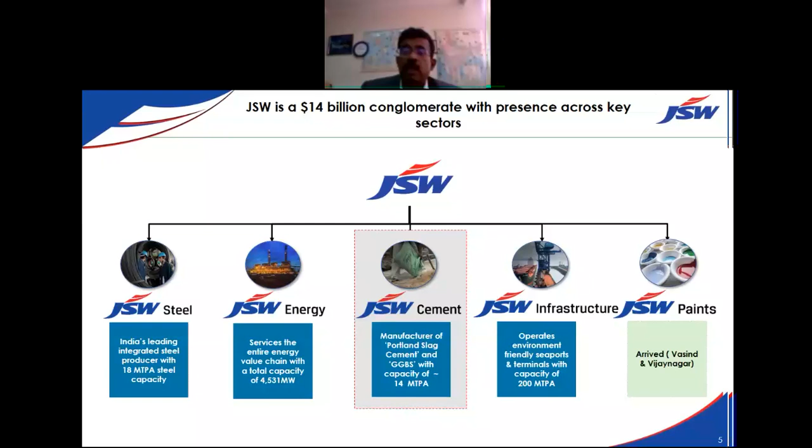We also have our own ports and jetties - JSW Infrastructure takes care of handling cargoes, seaports and all. Very recently, we launched JSW Paints, making both decorative and industrial paints. In this segment also, we are making eco-friendly paints, and you can get 14,000 colors without paying extra money. Different varieties of colors can be made - that's what we are making.

Our contribution to the success of the Indian story is phenomenal. Not only in the manufacturing sector, we are also into sports - Delhi Capitals, we are co-owners; we have the Haryana Steelers Kabaddi team and Bangalore Football Club, and also Inspire Institute of Sports, which we started in association with various industrial bodies to train Olympic athletes. JSW is contributing in a big way to the sports sector.

Apart from that, as part of social responsibility, education is one field we are helping with - lakhs of people near our plants have proper education, food and nutrition programs. This is part of the JSW journey.

We are mainly present in southern, western, and eastern India. Very soon we are launching a factory in Rajasthan, Kota - Kota is the capital. In Rajasthan we have bought some limestones because Rajasthan is rich in limestone. Maybe in a year or so, we may start a cement plant in Rajasthan also. That's the journey of JSW.

We have various products: JSW PSC cement, which is eco-friendly cement, one of the greenest cements in the country. Then we have blended composite cement, JSW Comp Cem, available in southern India - it's a blend of fly ash and slag together. And Concreel HD is one more grade of slag cement which gives similar strength to OPC cement. In spite of using slag, we can give strength parameters equivalent to OPC cement, because everybody is using OPC cement in many parts of the country, especially south India.

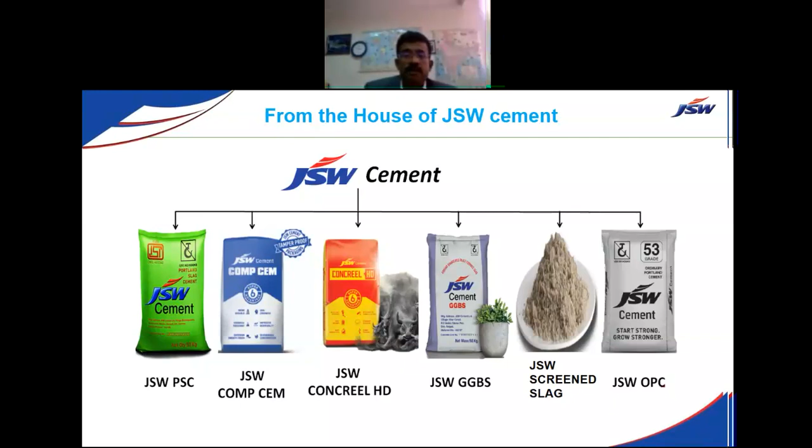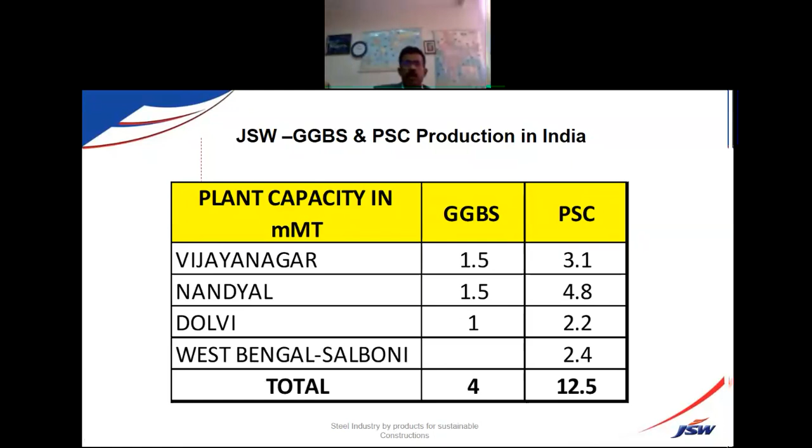Friends, this is our capacity. This was as on about 1 year back. 12.5 million ton capacity was there, and we have added further addition, and now we are close to 14 million tons. By 2020, it will be about 20 million. I mean, 2020 to 23, it will be about 22 million tons.

So coming to the main topic of today's presentation, challenges. The challenges the world is facing are phenomenal. By 2050, we are talking about 9.8 billion population living on the planet. Currently, it's about 7 billion population.

80% of the world population is moving towards urban environments, cities, because of better medical facilities, better health facilities, and job opportunities. People are moving towards the city. The migration of people is phenomenal in India compared to any other parts of the world, because take Europe or America, they are completely urbanized. But the maximum movement of the rural population towards cities will happen in India and China, because these two countries have the highest population.

So we continuously create more and more concrete jungles. When we create concrete jungles, what is going to happen? The passage of water will increase because we are concretizing the urban environment. More and more agricultural lands are getting converted to layouts, apartments, IT parks, industrial parks. Because of that, the water percolation when it rains doesn't happen at all. It starts flowing on the roads and buildings, and you are going to have urban floods.

With that, the city is getting completely flooded during heavy rainfall. More concrete jungle leads to the urban heat island effect, because the free flow of air doesn't happen when the buildings are there.

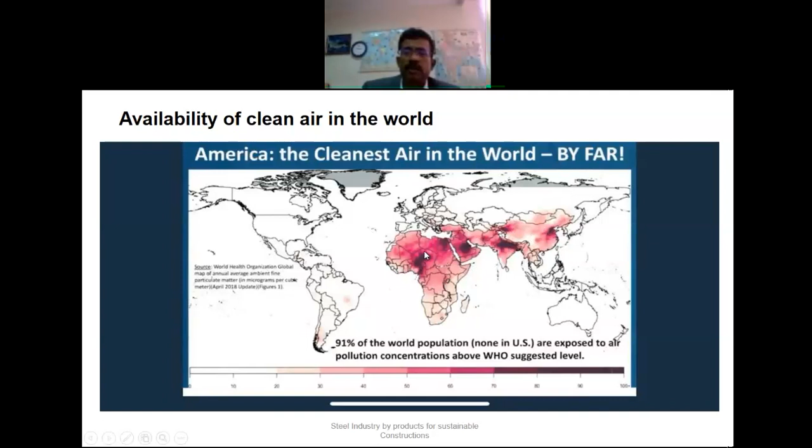So continuous emission of carbon dioxide leads to greenhouse gas effects, and with that we are going to have the urban heat effect. The city is getting more and more warmer. This is the environment we are getting.

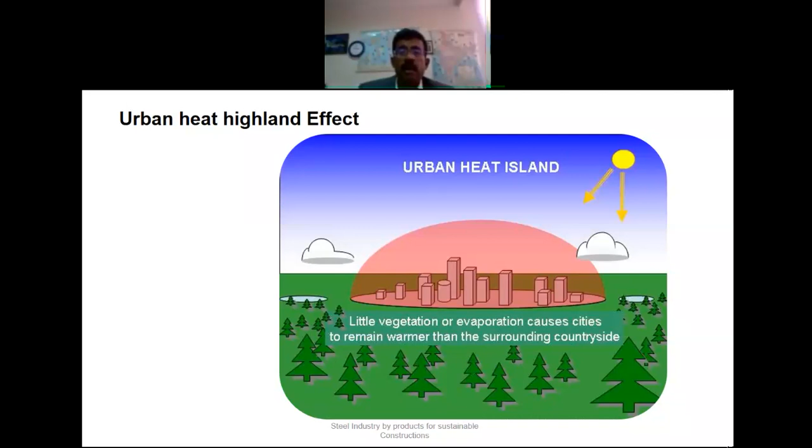Construction will not stop, as we all know, it's a continuous activity. We continue to build high-rise buildings. Take cities like Bangalore, Hyderabad, Mumbai, Delhi, they are continuously building high-rise because the constraint on land availability is increasing as we continuously move towards urban transport, metros. We need to continuously build tall structures surrounding the central business district where the metro lines are going, because of the government allowing higher FAR ratio. So as we continuously develop cities, tall buildings are coming, and construction activity will continuously keep on increasing.

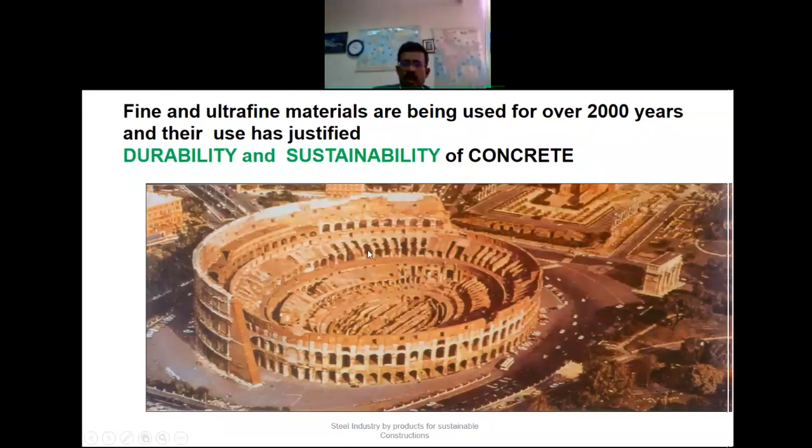Look at this building. The Roman Colosseum was built 2000 years ago, and still it is testimony, the building is standing, and they did not use cement concrete at that time. It was only lime concrete.

So sustainability, how to bring sustainability in construction? The bottom line is we should have sustainable construction continuously happening, it should be environmentally viable, equitable, bearable, and should give environmental impact, economic benefit, and social impact. This is what we are looking at from a sustainability index point of view.

Sustainability is nothing but reducing carbon dioxide emissions using local materials and bringing global technologies. Ultimately, we are aiming at lower energy consumption, lower carbon dioxide emissions from construction activity, and giving a prolonged life to the buildings, reducing the life cycle cost, and increasing durability of the building.

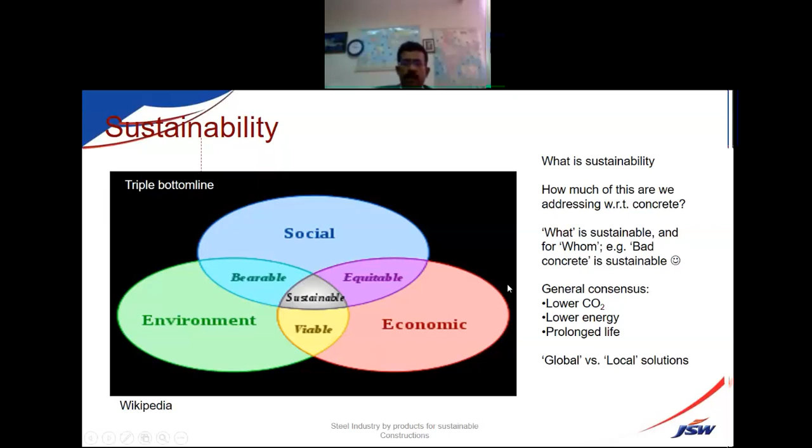So a green building is one which helps in reducing the carbon footprint, increased productivity, improved health, and occupation of the building. It helps people to live a peaceful life.

Coming to sustainability in concrete, dear friends, concrete has many ingredients. We have cement, aggregates, fine aggregates, and we use water. In Rajasthan, availability of water is a scarce commodity, so how to conserve water while making concrete is very important, because we need water both for making concrete and for curing it.

This improves durability of structures. Like the Roman Colosseum, which has stood for more than 2000 years, when we build structures it's not just for ourselves, it's for our generation and the next generations. If land value goes up, people may build higher buildings. Otherwise, people who build their own houses build for a lifetime, for their children's lifetime. So sustainability in concrete making comes in various ways.

Cement - how can we bring sustainability in cement? As I've already told you, 1 ton of cement liberates about 800 kgs of carbon dioxide - that is OPC cement. So you can bring sustainability in cement by using supplementary cementitious materials like fly ash and slag, GGBS. That is one thing we can do.

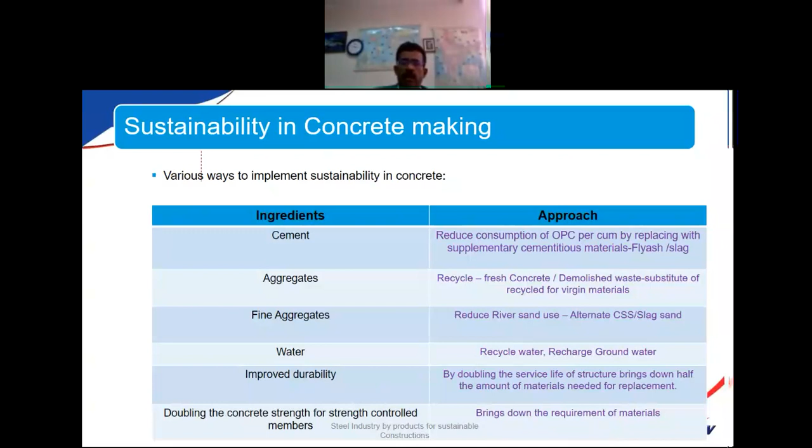With all that, whether durability of the concrete is getting affected is a challenge. I'm telling you, friends, using all these replacements, durability is not going to be affected at all - you're going to get more and more durable buildings only. That is what I'm going to advocate in the next slides of my presentation. So finally, we are looking at doubling the concrete strength in strength-controlled members.

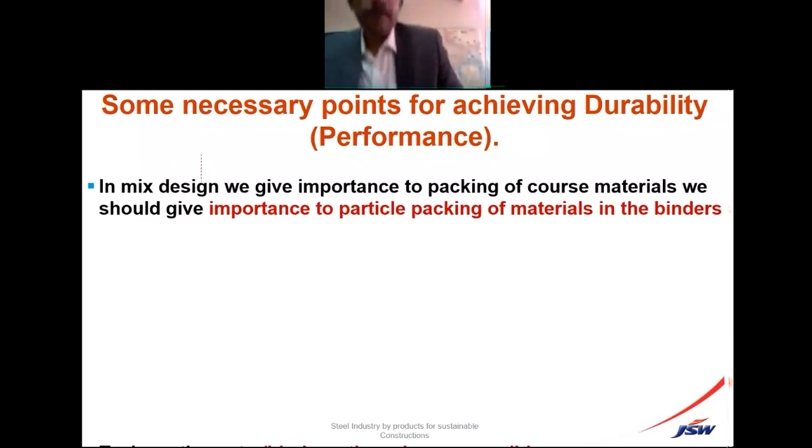So, some necessary points for achieving durability performance: we are looking at improving the performance of concrete by making the particle packing effect very effective within the concrete, and also keeping the water binder ratio as low as possible. That's what we are actually looking at.

We should use good quality fine materials like slag and fly ash. So gone are the days of excessive use of OPC and water - we have to reduce usage of pure OPC cement and water. However, curing is very important in concrete making.

1 second. There was a small thing.

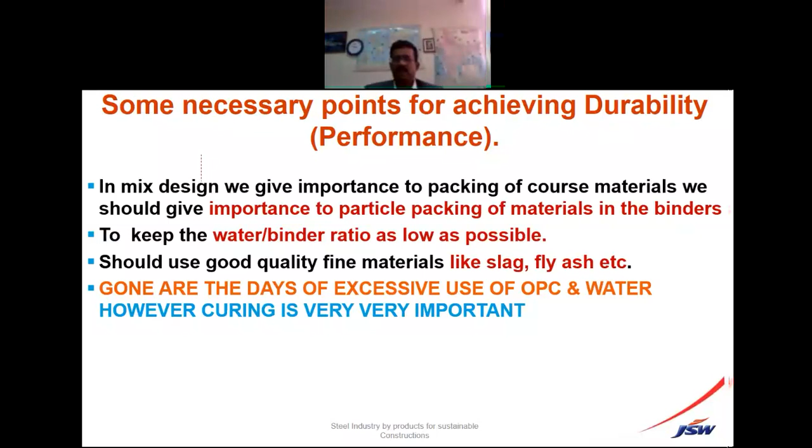However, curing is very important in concrete making. So, dear friends, the new generation green materials which are eco-friendly - looking at mineral admixtures, chemical admixtures, alternatives to river sand, and alternatives to coarse aggregates - these are various types of alternative materials now available in the construction field. This has been developed through scientific research and is being adopted everywhere, in each and every part of the world, not only in India.

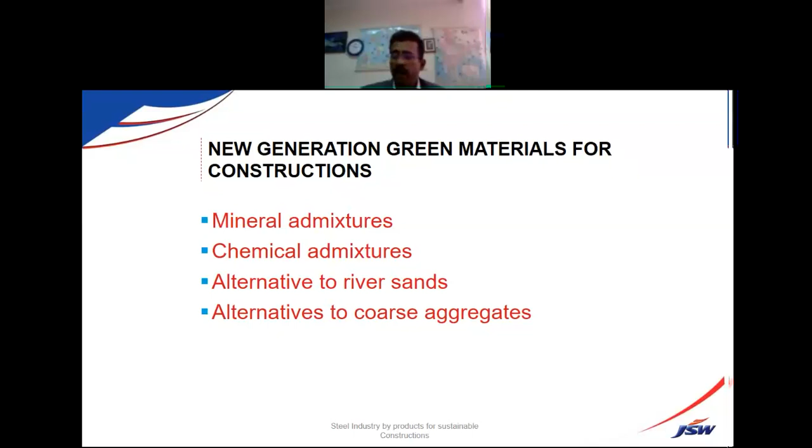People are moving towards sustainable construction, moving towards net zero buildings. That means the entire building life cycle doesn't emit any carbon dioxide. So that's the way we are looking to develop sustainable solutions for construction.

Coming to the one product that always comes to mind - sand. Everywhere you can get high quality cement because it's manufactured by reputed companies and corporates, so you don't have any problem with cement. But when it comes to sand, you have a problem, because sand is traded locally - local agents will give sand.

We don't know what is mixing, where it's coming from, and all that. So the quality of sand is always an issue when selecting sand. And nowadays the river sand has been completely banned.

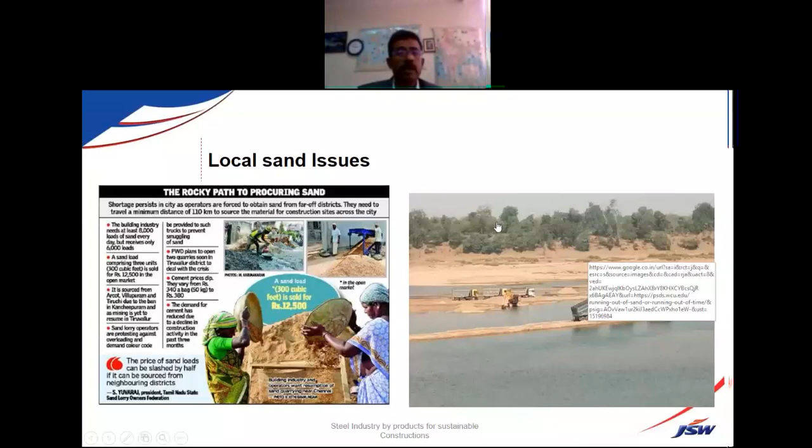Because if you are using sand from the river basin, there's an issue. The flow of water in the river is getting down every day, and we have a problem with groundwater sinking day by day because of the continuous dredging of sand from the river basin. So considering all that, the river sand has been completely banned all over the country.

We know there's a UN report on sand mining. They're talking about close to 59 billion tons of sand being mined globally for construction activity. This is a huge number looking at the material demand.

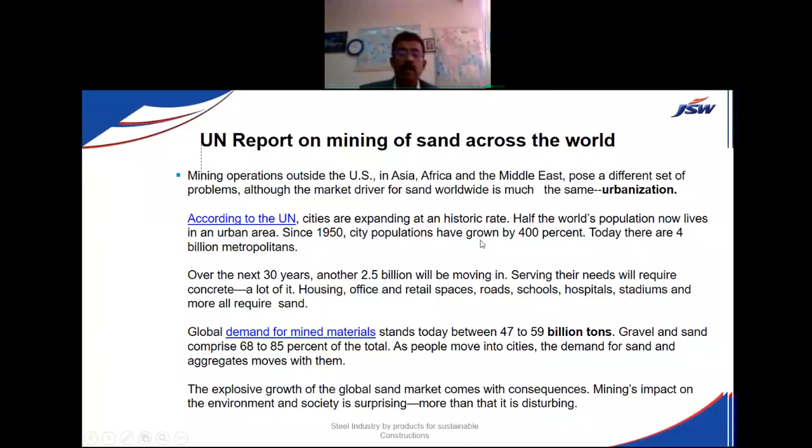So we need to use alternative materials to bring down the dependency on natural materials, because natural materials are not going to be available continuously.

So this is one river basin. You can see it's kilometers together in China, because continuous dredging of the river basin for sand makes the river completely barren. There's no water flowing in this river at all.

In India also, considering the ecological imbalance, people stopped dredging river sand. In some parts it's available whenever there is excess sand, because you need to continuously maintain the depth of the river, otherwise water will start flooding everywhere. So to manage this, they allow a certain portion of the river to be dredged and mined for sand.

This rally for rivers by Sadhguru Jaggi Vasudev, he started for the Kaveri. All along the Kaveri basin, they wanted to plant trees in a 1 kilometer stretch so that the flow of water improves in the Kaveri basin, which was earlier a perennial river but is now not flowing every season.

So they are planning to improve the flow in the river basin. Earlier we demolished the river basin by continuously dredging the river sand.

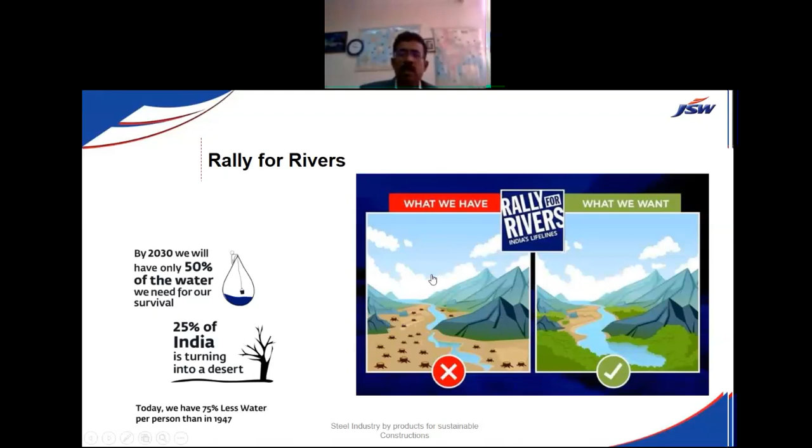So if I give you sand which is equivalent to river sand, from a byproduct, will you not accept it? One that is similar to river sand in terms of properties—in fact better than river sand in terms of purity. If I give you that kind of sand, you'll definitely accept it.

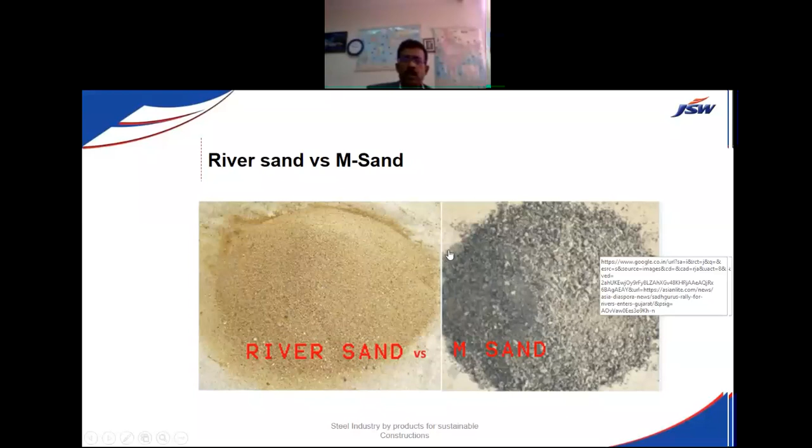So in that direction, JSW has done a lot of innovation and research work to reduce the dependency on sand from river basins. When we look at river sand, we have scarcity, environmental issues, and legal issues. So to replace all that, we have developed technologies called alternative aggregates.

The government of Karnataka also came out with a circular that manufactured sand can be used. This manufactured sand comes from various sources, like breaking mountains. But even breaking mountains for sand is not an eco-friendly activity. For aggregates, you break mountains using crushers and all, but if you start doing that for sand too, it's not going to be very environmentally friendly.

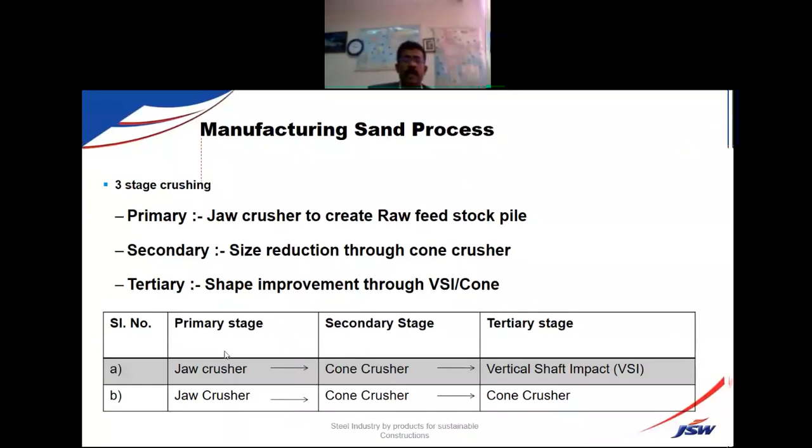Considering that, even the Karnataka government started importing sand from Malaysia. They were trying to sell it in bags, but that also did not materialize. So then JSW came into picture to manufacture sand from steel slag.

These are the various manufacturing processes we have. So for M-sand, the advantages are many. It's an ecologically benefiting product—it's eco-friendly because it avoids the dredging of rivers.

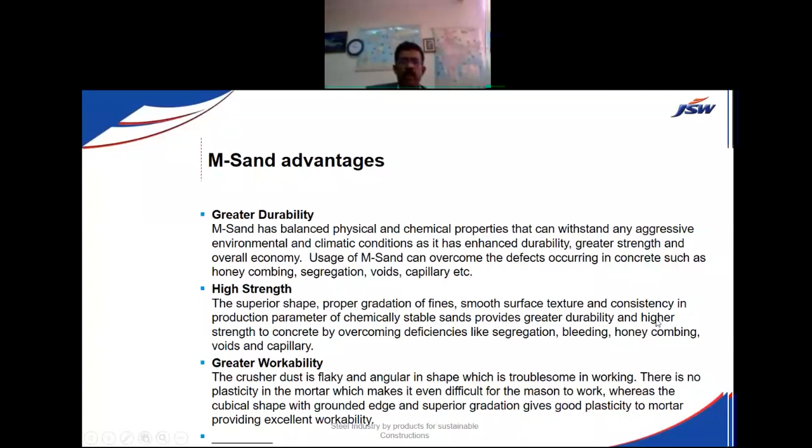And looking at the advantages, there's greater durability and performance enhancement. You get higher strength in the concrete and also greater workability compared to river sand. These are the advantages of M-sand.

This is one of its kind in the country. JSW has installed a sand manufacturing factory at our Bellary Toranagallu plant. This sand is being manufactured using our slag, which is a byproduct of the steel industry.

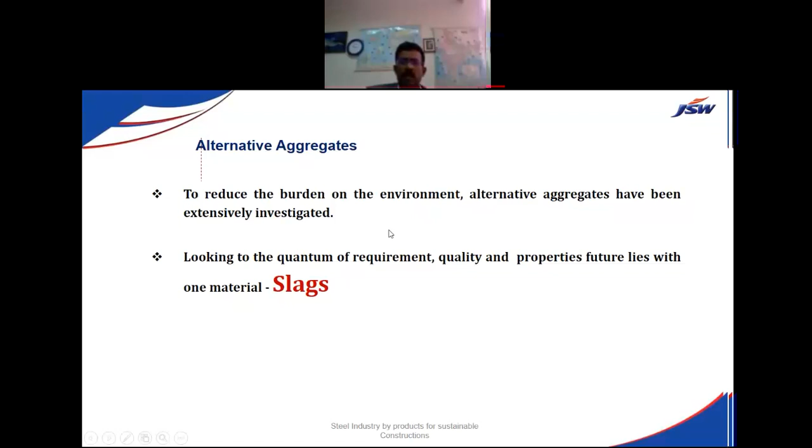So I would like to talk more about slag. A lot of research work has happened in many universities and colleges on slag sand, and they have come out with excellent results.

So what is slag? Slag is a byproduct of the steel industry. It's a non-metallic product—a product of silicates and aluminosilicates of lime, which we use for making steel. It's a byproduct, so I would like to explain how it is manufactured through a pictorial presentation.

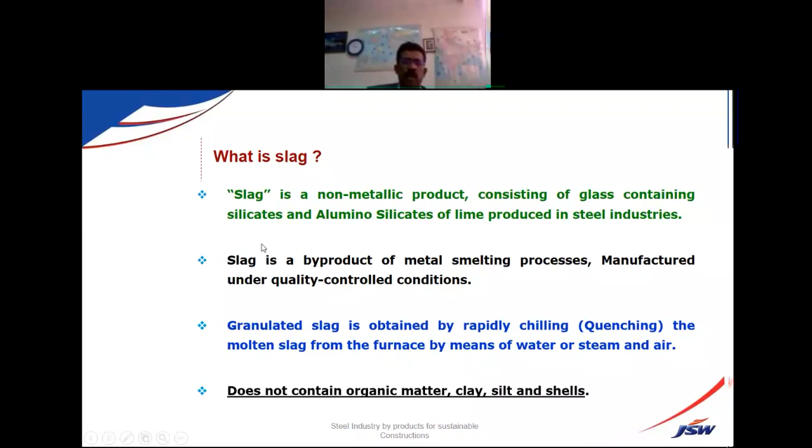This is the pictorial presentation. This is the iron making process, where we have a blast furnace in which we add iron ore, then we add fluxes and coking coal.

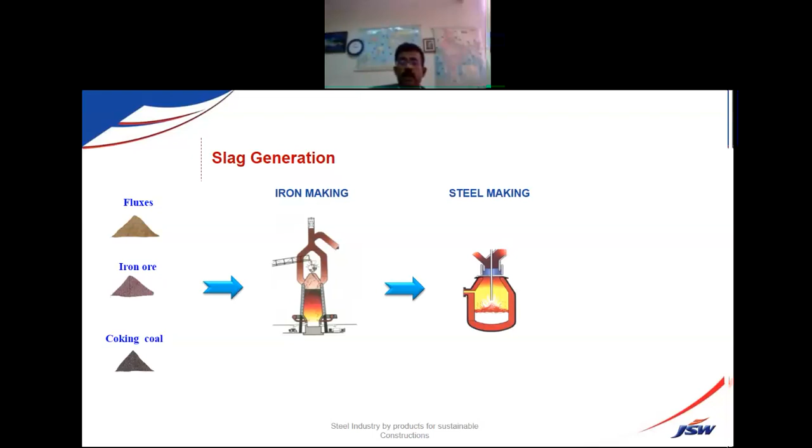This byproduct is taken out and quenched using chilling water into granules. This is a highly mineral rich product which can be utilized for making various products. So in steel making also we generate slag. As I told you, in iron making we generate 300 kgs per ton.

In steel making we generate about 200 kgs per ton. This is what we get in steel making. It's quite a substantial quantity considering the steel production in India, about 130 million tons.

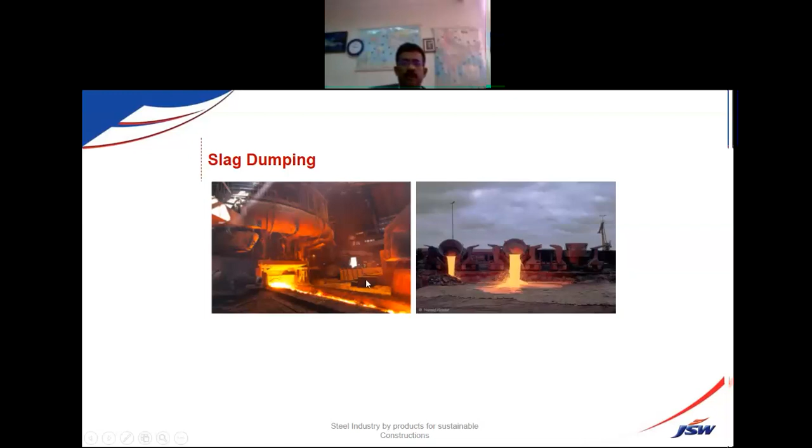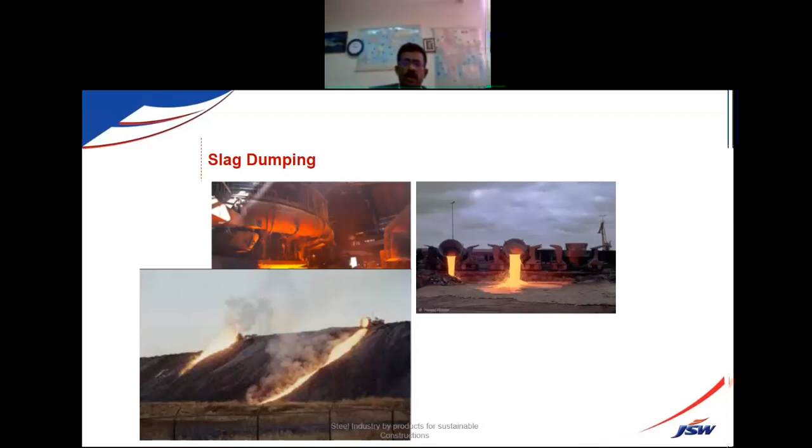So slag dumping happens - this was an earlier method. People used to dump slag and were not bothered. But in countries like Europe, Germany and other European countries, they started using slag long ago, more than 100 years ago, converting it into useful products. So it's like a mountain of slag, but it is now being consumed completely into valuable products.

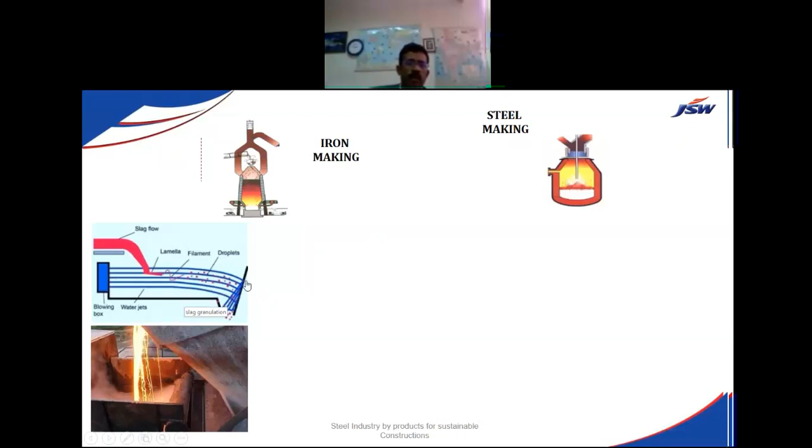So how do we convert it into a useful product? When the slag comes out, we have a separate setup. Through that it flows, and we put water jets and a blowing box. With that it gets converted to small granules, becoming granulated blast furnace slag used for fine aggregates.

When we do air cooling, we don't use this methodology - it's from the steel making. We get air cooled LD slag, which is a little darker in nature. We make coarse aggregates from this. These products are very eco-friendly products which satisfy the requirement of aggregates, and can be utilized in every application - roads, construction, concrete making, house building, everything.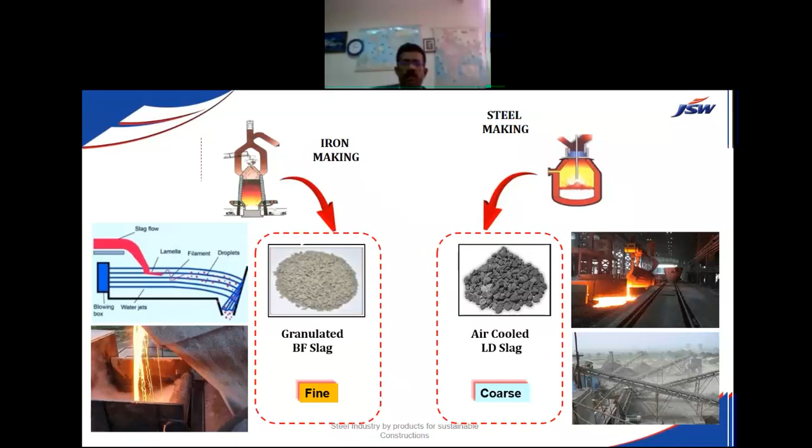Looking at the specifications, I've given a small gist here. River sand is there and also GBFS, the original material. It was not meeting the exact requirement in terms of specific gravity and density, because river sand density was 1400 to 1700 kg per meter cube, and this slag was giving 1000 to 1100 kg per meter cube density. Specific gravity was also less, and water absorption was a bit more compared to river sand.

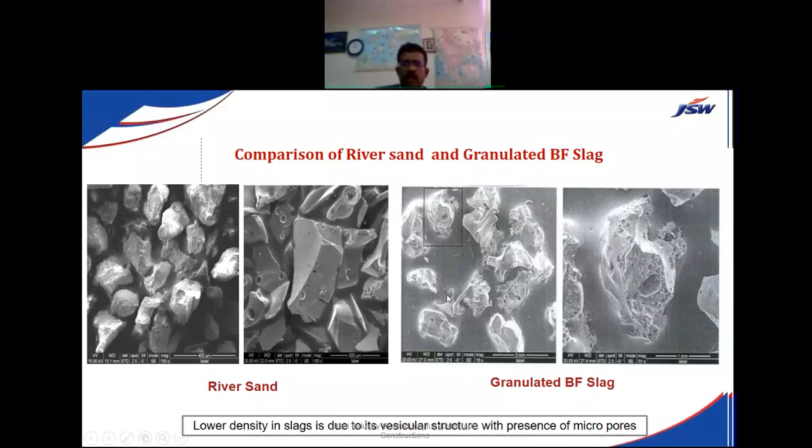So to remove the oversized particles, and improve bulk density and specific gravity, we used a manufacturing process - first of its kind in the country - and converted the granulated blast furnace slag into processed granulated blast furnace slag, which meets the requirement of our IS standard as well as the specifications of river sand. The processed one has the particle shape completely improved, with no sharp edges. The processed granulated blast furnace slag is similar to river sand.

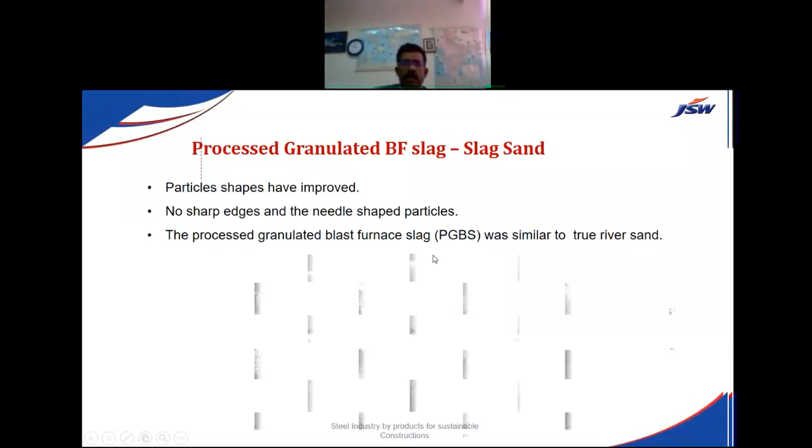The granulated blast furnace slag, at this stage, is getting converted into a finished product. The processed one has a round particle shape, and also uniform particle size. Looking at the gradation curve, the processed slag, what we call manufactured sand, meets the requirement of gradation zone 2 specifications as per our river sand.

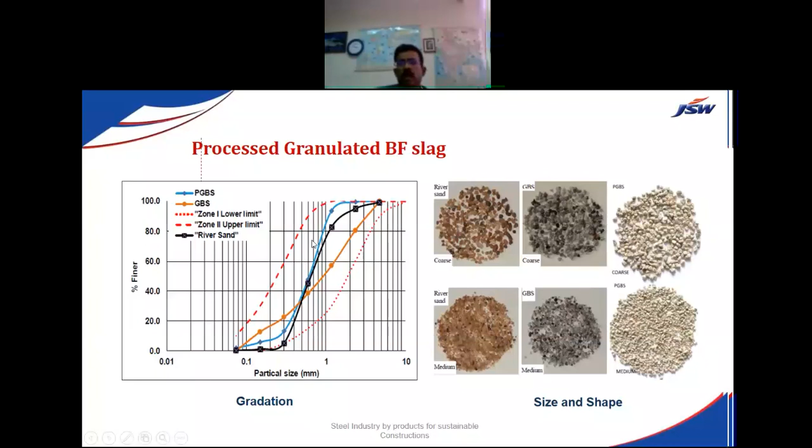So you can see a changed product. The density is already improved to 1500 kg per meter cube, compared to the GBS which was earlier the raw material. And even the specific gravity is 2.65, meeting the river sand specifications, with water absorption less than 3%. So by changing the product through process industry technology, using global technologies and manufacturing processes, we can modify the product to meet river sand specifications.

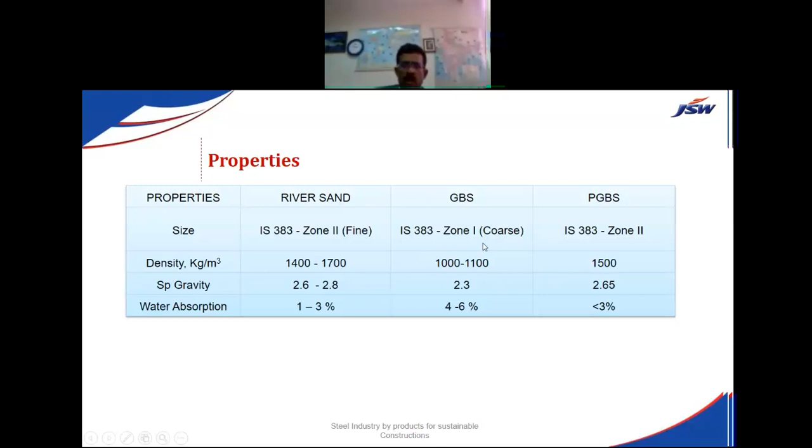You can also look at the advantages. In case of slag sand, we don't have marine products, about 2 to 4%, which river sand has - because river sand is a natural sand that flows through hundreds of kilometers before we take it as river sand. So we get oversized particles, clay and silt - it's a mixture of everything. We need to really sieve the sand to get good quality river sand for plastering or concrete applications.

In case of slag sand, it's a ready-made product from a manufacturing process - that's the advantage of slag sand. So even though this product was being dumped earlier, now it is being used as a useful product for construction applications. You can see the comparison between slag sand and river sand, having similar shape and particle size - this is the microscopic picture. We have modified the particle size to be similar to river sand.

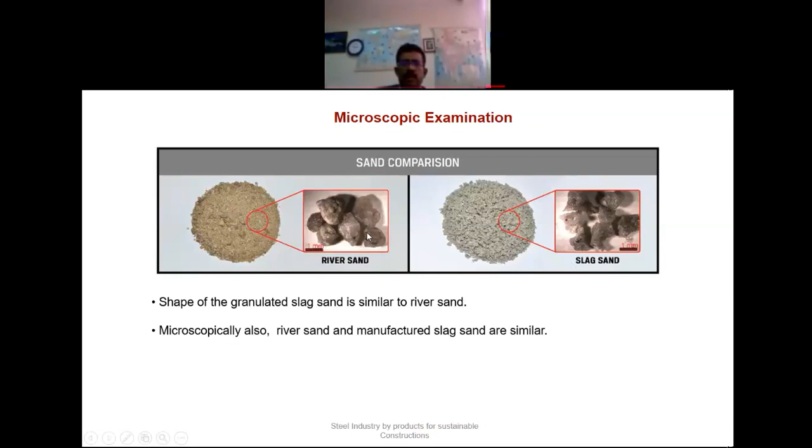Through various research work, we have found that even though the code is now giving about 50% replacement for plain concrete and 25% replacement for structural RCC, we can use 100%. We have done various studies and we are now requesting the Bureau of Indian Standard to allow us to go with 100% replacement. That may happen very soon.

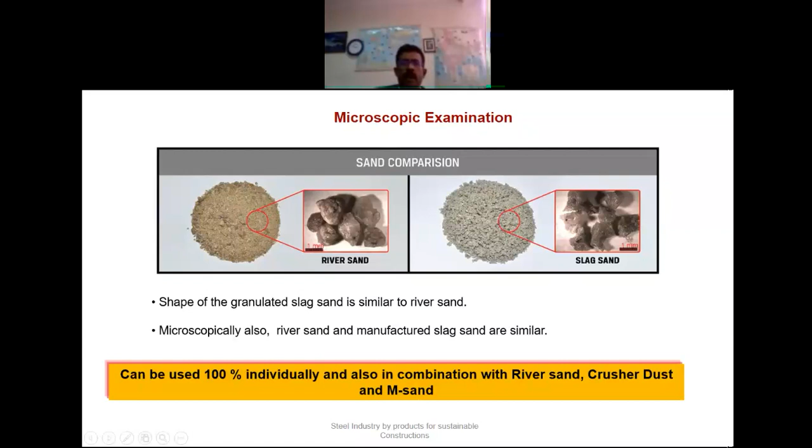So, to accept any product, my dear friends and students, we need to analyze the various chemical and physical properties. We need to conduct tests and ascertain the properties as per IS 383 specifications. We have done all the tests at various reputed laboratories like Indian Institute of Science, NCCBM, Bureau Veritas, and various other laboratories in India.

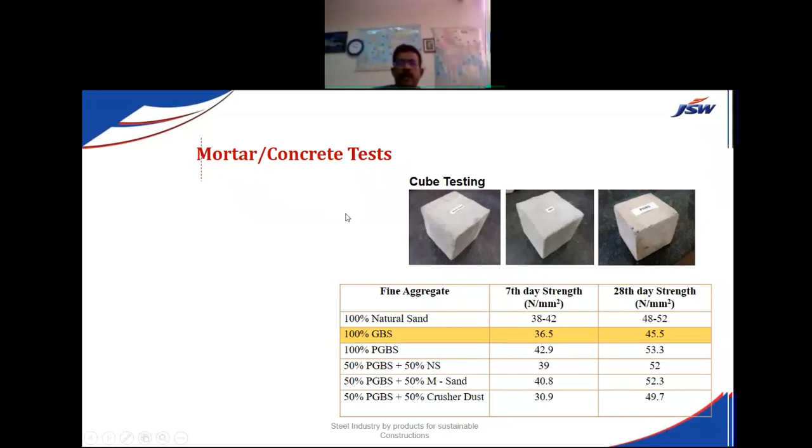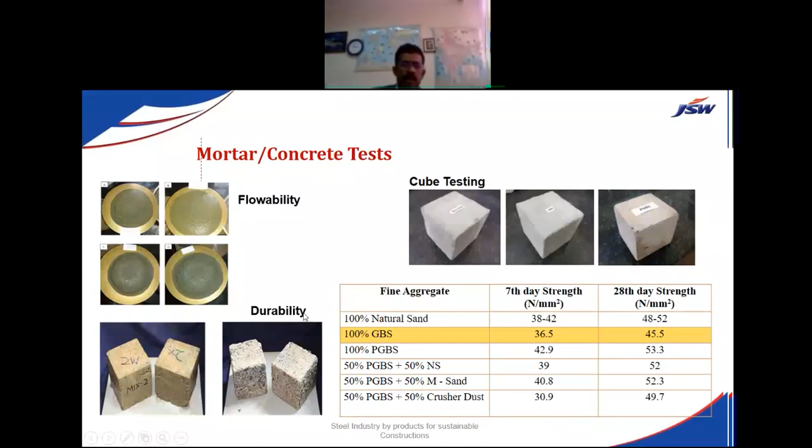We have also done flowability tests, durability parameters, acid tests in acid medium, alkali silica reactions - everything has been tested as per the requirement.

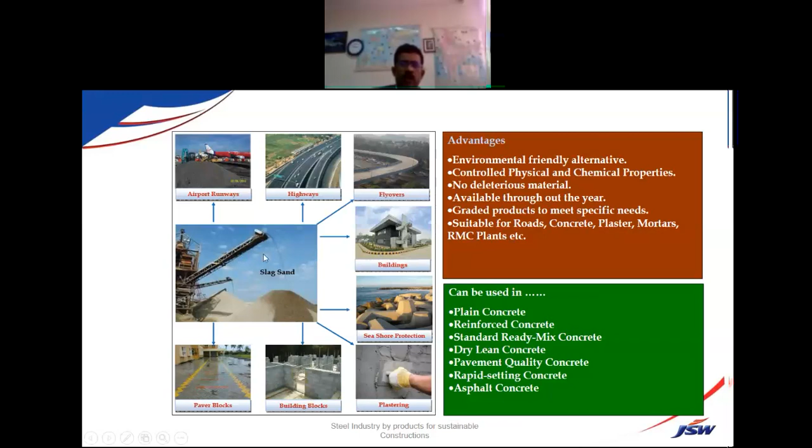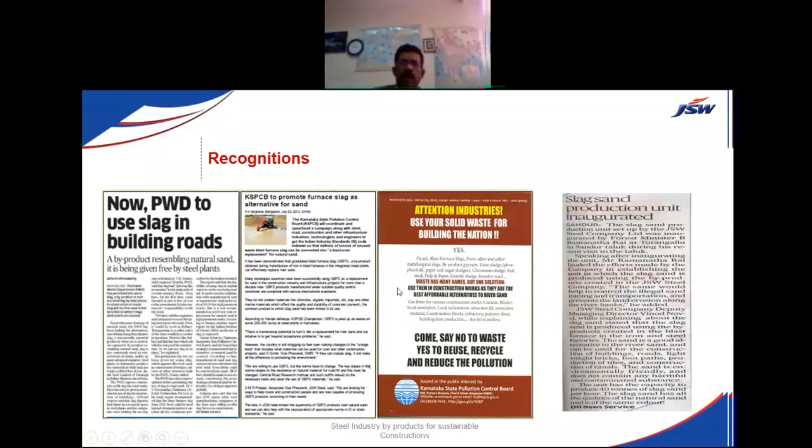Using slag sand, we manufacture many products with many applications - for airports, highways, plastering applications, buildings. The Government of Karnataka PWD has approved usage of steel industry byproducts in their specifications, and the Pollution Control Board has also given clearance. These are the various testimonies we have.

Slag is the best alternative to river sand. Expert opinion is also there in various leading magazines. Many articles come in leading newspapers about how it is eco-friendly and how it is helping.

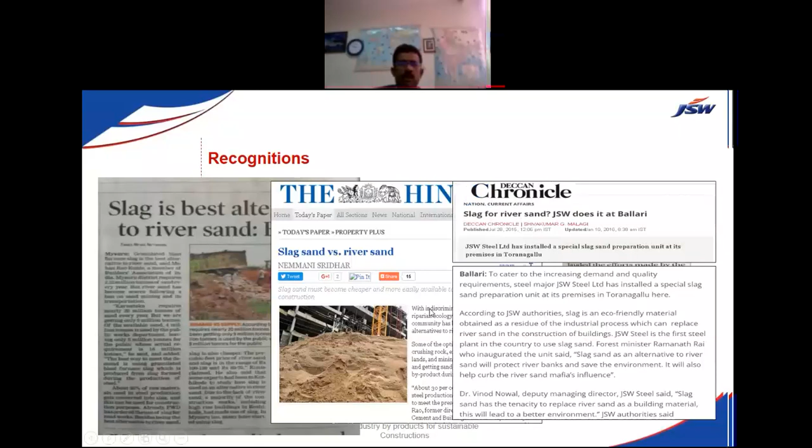So these are the various applications, my dear students and friends. We have got almost 10 square kilometer campus near Bellary, that's Vijayanagar. We have our housing colonies and factories there. It's a big setup, like Jamshedpur - actually much bigger than Jamshedpur.

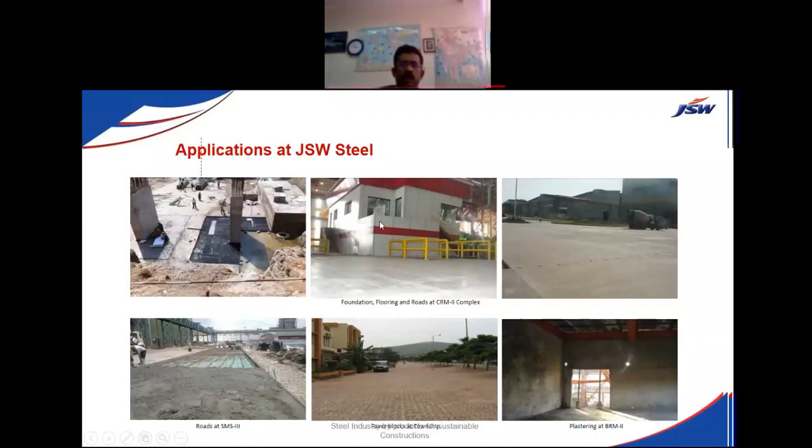It's an industrial town. For all the building construction, we are using this product for plastering, pavement quality concrete, buildings. You can see the structures - even heavy duty floorings have been done with these products at JSW steel mills, where we put all the steel coils on the flooring.

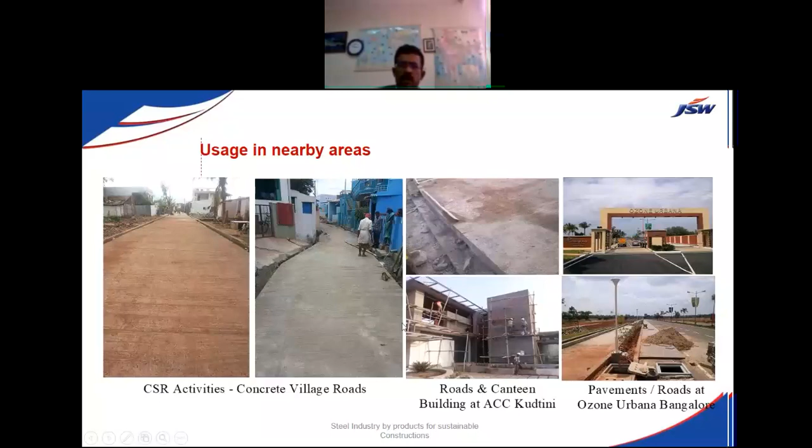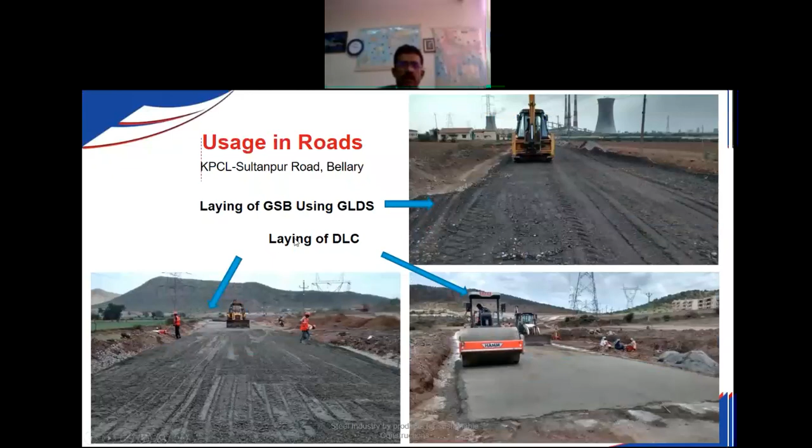We have also worked with nearby village roads, and in Bangalore we are using this for Ozone Urbana road works. Government projects like Nirmiti Kendra have started recommending and using slag sand, as has Karnataka Power Corporation Limited. Many projects are continuously using it in road construction, including Karnataka Rural Infrastructure Limited. It's approved by all the parties.

So it's a completely slag road being built by Gammon India.

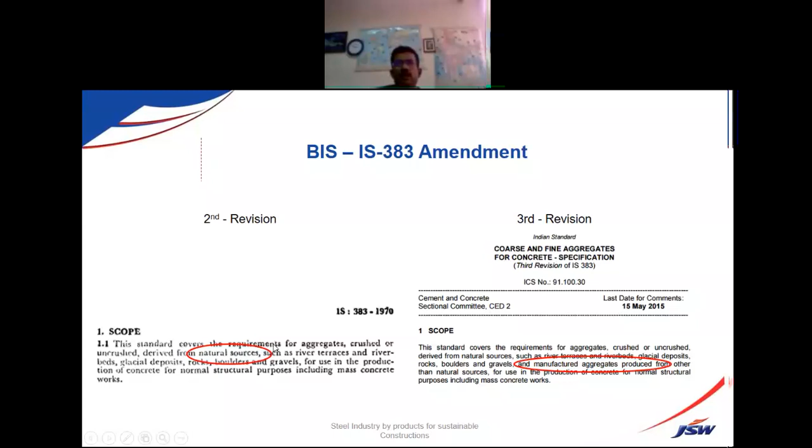There's a recent change in the IS 383 specifications. Earlier they mentioned that fine and coarse aggregates should come from natural sources, because at that time, in 1970, natural materials were abundantly available. But nowadays the code got a revision in 2015, and they have mentioned that manufactured aggregates can be used. So in the code also, the usage of aggregates from artificial sources like byproducts is now approved - there is no problem at all.

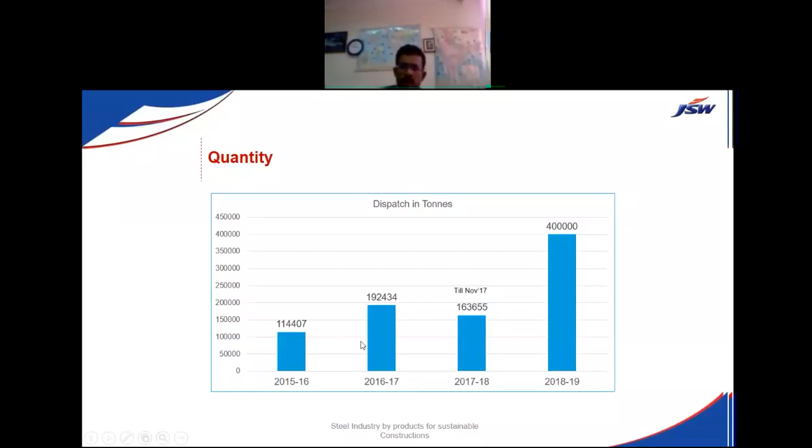Coming to the next stage of the product, the slag can get converted into GGBS, ultrafine slag, and cement. We take that blast furnace slag and take it to the cement mill using a vertical roller mill, and grind it to fine powder. This becomes part of a cementitious material called GGBS - a very eco-friendly product, with close to 3 million tons per year being consumed in South and Western India.

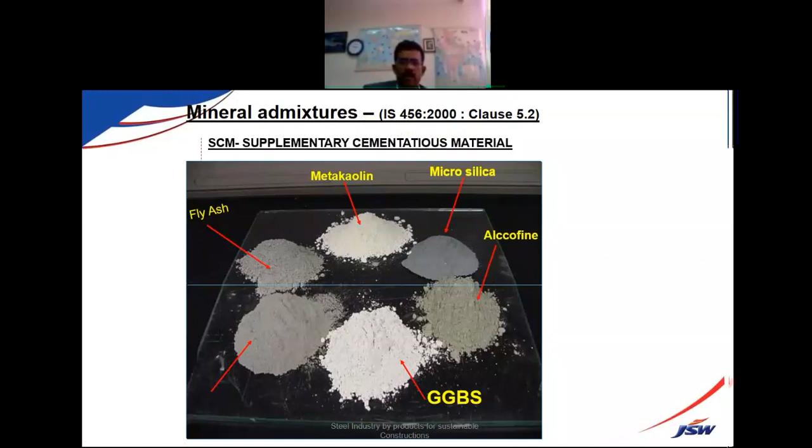So dear friends, you can ask me, sir, this product is very good, I know, but can I use it in concrete applications anywhere? You can use it because IS 456, table number 5, clearly mentions the usage of fly ash or ground granulated blast furnace slag in concrete making at various percentages based on exposure conditions - mild, moderate, severe, very severe, extreme. We can use this product in various grades of concrete - we have done M100 grade concrete also using GGBS.

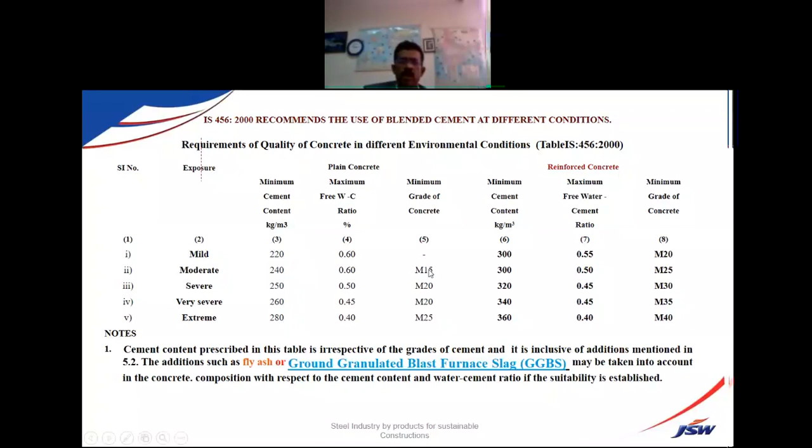The mineralogy of the slag I want to share. There's an IS code, IS 12089, which says the manufacturer of slag should have certain properties. The glass content is one they talk about, 85%. What we are manufacturing at JSW is between 90 to 95%, which is almost similar to slag from Japan.

Japan are the people who are expert in making good quality steel. There they take out the slag and consume 100% of it in all concrete productions. Japan is one of the biggest countries in the world which manufactures steel, and they consume 100% of the slag produced from the steel mills.

Similarly, IS 456:2000, considering durability parameters when sulphates and chlorides are present, exposure conditions, Table 4 clearly mentions the usage of slag cement when both chlorides and sulphates are present in the concrete.

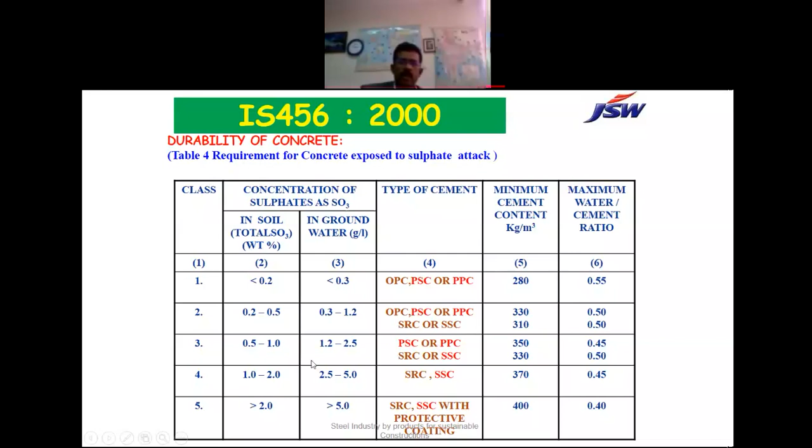Coming to the percentage usage based on applications, we can use this slag in concrete making starting from ground structures. When early strength is required, we can go to 25 to 35%. For underground structures, 35 to 50%.

For mass concreting applications, about 50 to 65%, especially raft foundations, 1 meter above raft foundations. Generally they go with high percentage of slag to reduce the temperature differential between the top surface and the middle of the concrete, which should not be more than 20 degrees centigrade.

So in many raft foundations, you have to control the temperature during the initial stage. They go with replacement of OPC cement with slag.

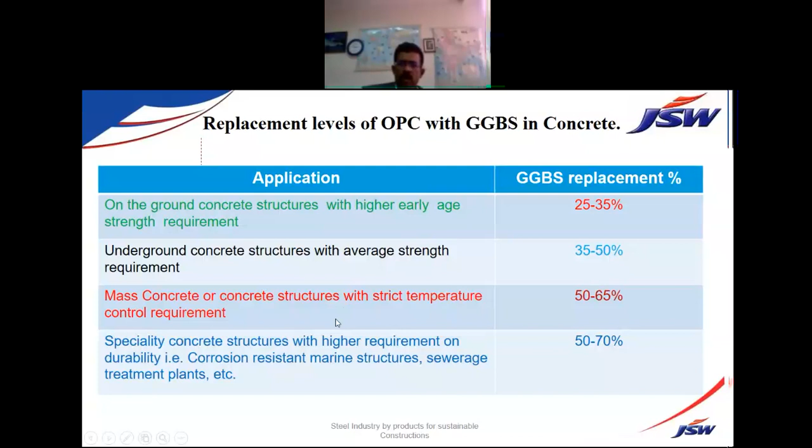There are concrete structures built in marine environments, sewage treatment plants, where 70% is a must because these structures face sulfate attack, chloride attack, acid attack, and alkali silica reactions. So the concrete has to be very strong. If you make it with pure OPC cement, 100%, the concrete will deteriorate within 5 to 10 years. So to have a structure lasting more than 100 years, you need to go with a higher replacement of slag.

So this, if it is there in the body, starts leaching out. You can see white patches coming out after 3-4 days of concrete making. This is called calcium hydroxide. So this is detrimental. Generally, sulfate attack, chloride attack, and carbonation happen because of this product.

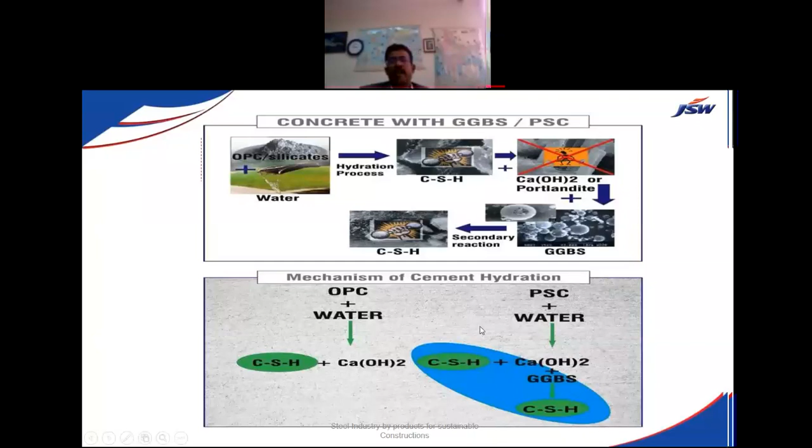This is the pictorial presentation, the line diagram. You can see additional calcium silicate hydrate gels being formed because of the hydration process. This is the line diagram I've already explained to you. It's a beautiful product.

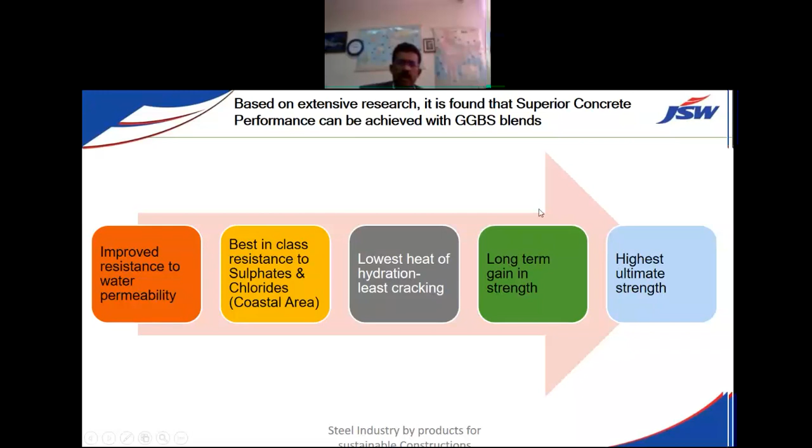It may not be available in Rajasthan currently, but if you want, you can get the material. We can give it to you for research work and all, so you have to pay the freight for that. You can do a lot of research work with it. Very soon, you may also start getting the slag if more steel plants come into that area.

This I've already explained, the improved performance, and there are many case studies. I don't want to spend much time, it's already 10 o'clock. These are testimonies of the product's usage in various projects: Tricon RMC, Sobha Indraprastha project, Bangalore Metro Corporation, Pune Metro Corporation, Mumbai Metro Corporation, Chennai Metro Corporation. Many government departments are using these products. Let me go through this quickly.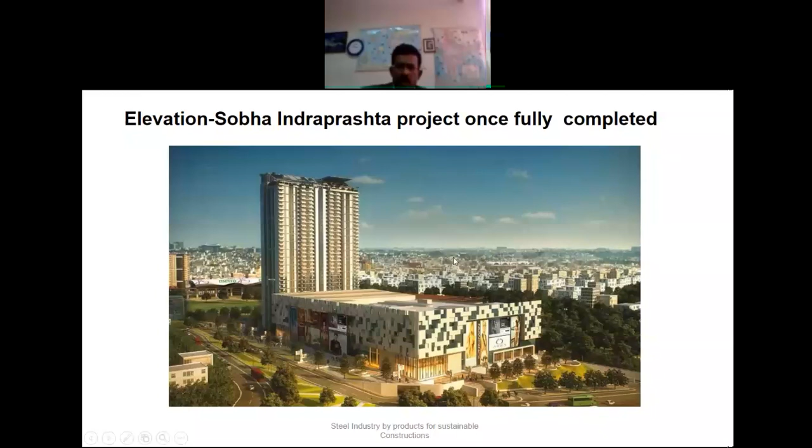This is one of the biggest malls in India, recently opened, Sobha Mall, Globus Mall, with these concrete strength parameters. You can see M25 grade concrete, using 170 kg OPC and 170 kg GGBS, developed almost 56 MPa strength.

This is the record I have taken from the laboratory, because we kept the cubes for 56 days, 90 days, and 180 days. Since you may not believe me when we just type numbers, this is the actual record from the laboratory, so you understand the data is authentic.

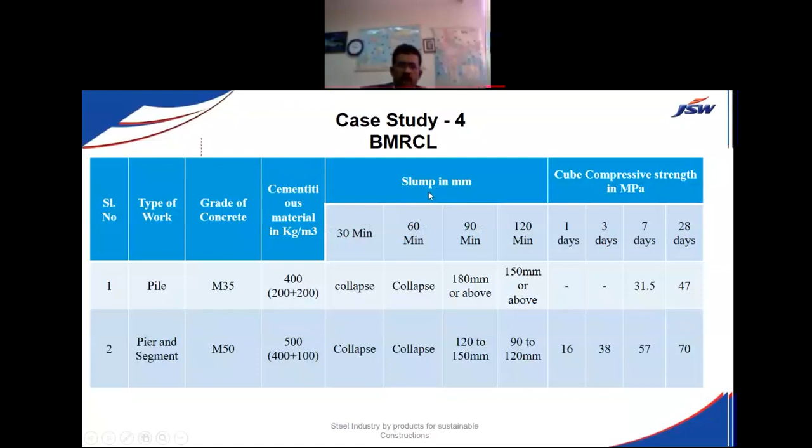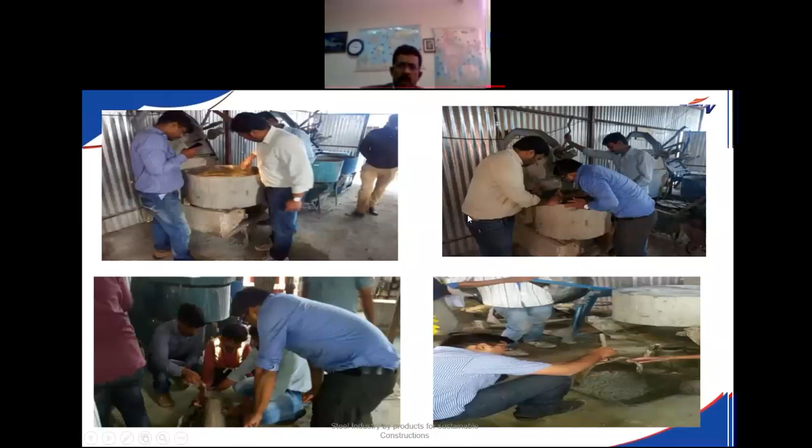This is Bangalore Metro. In all stages of Bangalore Metro, they adopted various grades of concrete. These are the trials our team did along with the Bangalore Metro team, because earlier they weren't ready to accept these products—everybody has their own doubts when a new product comes. So we worked with everybody, did the trials and mix designs, and it was successful. Now each and every package, they come first.

They ask, 'Sir, what is your GGBS rate? We want to include it in our specifications.' They want to use it like that, they tell us. We have also done these strength parameter studies in various labs.

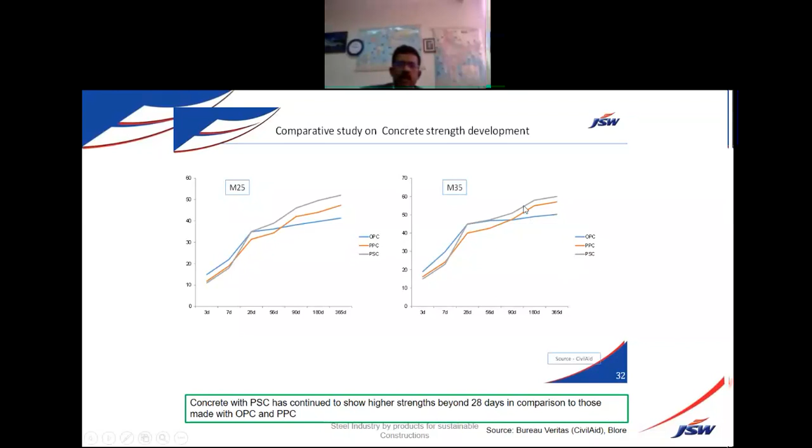M25, M35, you can clearly see the growth of strength. The PSC cement strength is much higher than OPC cement.

This RMC industry in India is continuously growing. Way back in 1990 it started, and in 1992 the first RMC plant was started in Pune. Growth has been phenomenal because of the huge demand for concrete on project cycles.

The first phase of development was only in 78 cities. I feel now each and every city has RMC plants—maybe more than 200 cities and towns in India have more than 6,000 plants. This is the growth; I was part of RMC India and traveled across India to establish RMC plants.

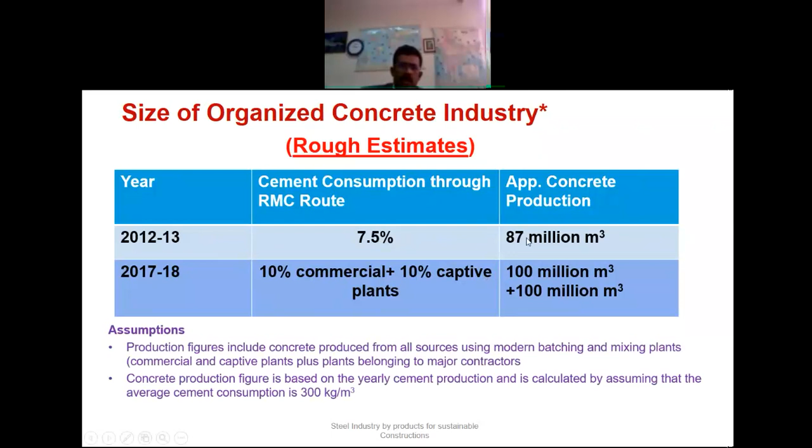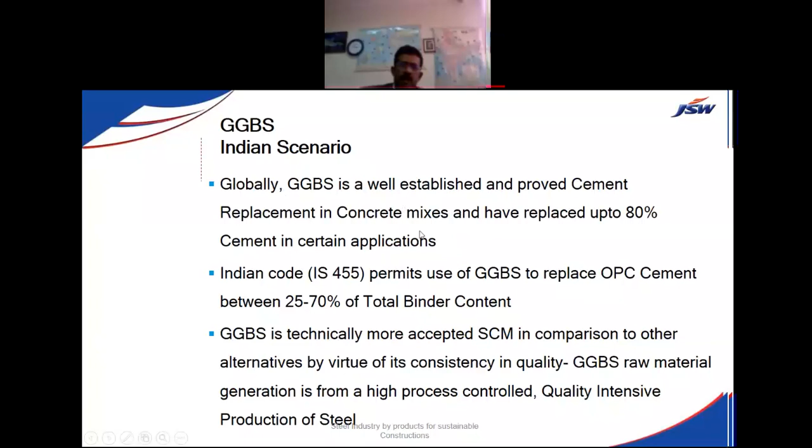You can see the growth of the RMC industry, and the demand for this cementitious material is increasing. So globally, GGBS is getting accepted everywhere because of its technological benefits.

You can see the product being used in many other applications like concrete blocks, AC sheet manufacturing, chemical admixtures, and we are also exporting to many countries.

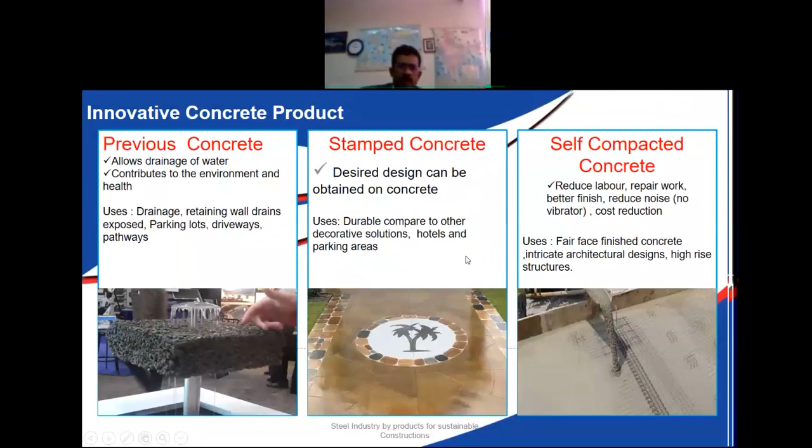We can make special concretes using this slag industry byproduct: pervious concrete, stamped concrete, self-compacting concrete, white topping, fiber reinforced concrete, high early strength concrete using advanced admixture modifications, coastal environment high durable concrete, and colored concrete.

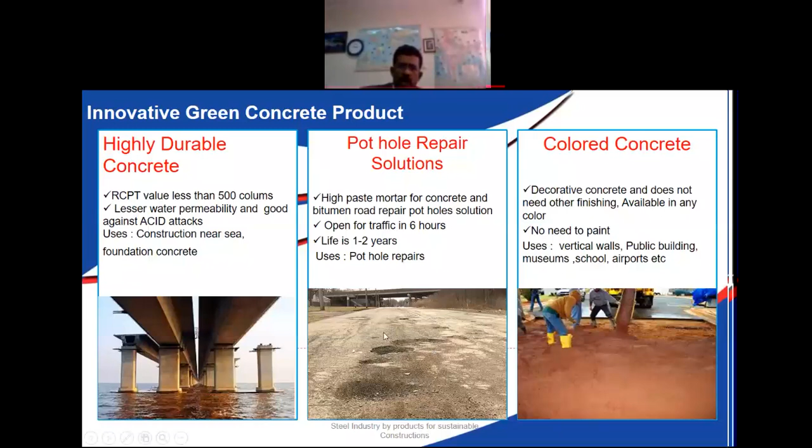It's very good for colored concrete because GGBS is white in nature, reducing the demand for pigment. With a lesser pigment concentration, we can make colored concrete using this. It's also used for maintaining and repairing potholes, making high early strength concrete, and repair mortars.

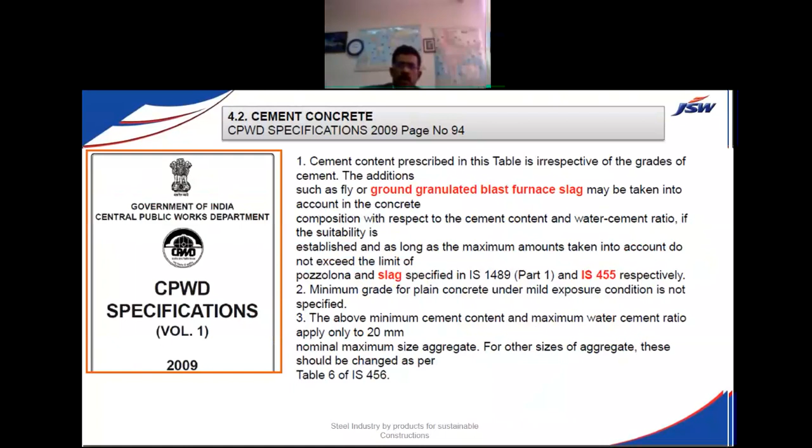Many governments have approved this product: Karnataka PWD, Tamil Nadu PWD, IRC for PQC under IRC 15:2017, and CPWD. These are all central government establishments that have approved it. Defense establishments have also approved it, along with Chennai Metro Corporation and many national highways.

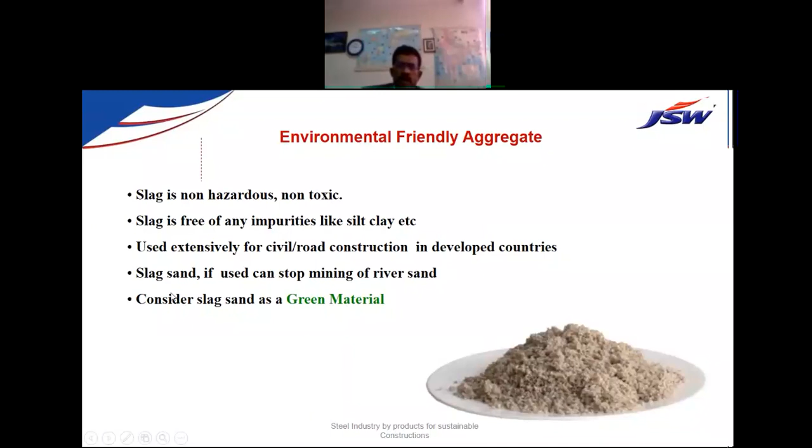So I want to conclude my presentation using steel industry byproducts—it may be sand, GGBS, PSC cement, or composite cement. It's a very eco-friendly activity and very good; it's a green product, certified by IGBC.

I would like to conclude, my dear students and friends, that you should start adopting these alternative materials and technologies, and you can do research work. If the product is not available, you can be in touch with me, I'll try to get you the product, though you may have to spend some money for transportation. We also have people who can send you to your place if required, with flight charges and all. You can do research work on GGBS and slag sand, and start using these products for better performance and better durability.

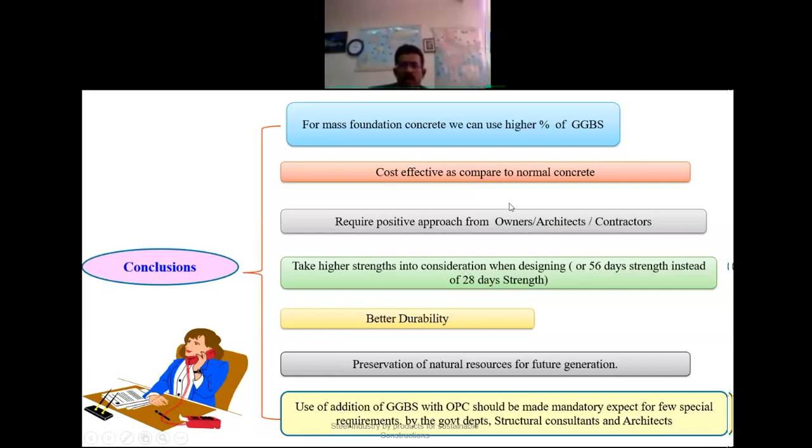At the end of the day, we are saving our planet because, as I've already told you in the beginning of my presentation, carbon dioxide emissions are mainly contributed by the steel and cement industry. We will continuously use steel and cement for construction since we don't have any replacement for these two products. So as we increase the usage of these products, our responsibility as civil engineers in construction is to reduce the carbon footprint and achieve sustainability and durability, which can be done in terms of economic benefit too. You can use GGBS and slag sand for your construction. These products are GreenPro certified, all the products are certified.